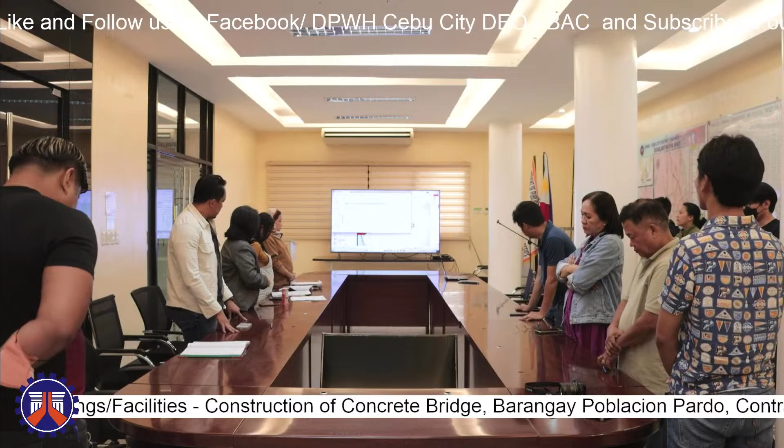Let us put ourselves in the presence of the Lord. Our Heavenly Father, we offer you our thanksgiving. We thank you for everyone gathered here today to walk with you. May we ask you for your blessings and guidance so that the activities set for this undertaking be successful. We ask you to open our eyes to see the wonderful things from this activity, open our ears so that we may retain the invaluable knowledge, open our minds for us to think wisely. Put us with understanding, cooperation, and peace in fulfilling our responsibilities. Open our hearts so that we may receive your everlasting love, and open our spirit so that we may know that you are with us all throughout the day. We ask all this in the name of Jesus Christ. Amen.

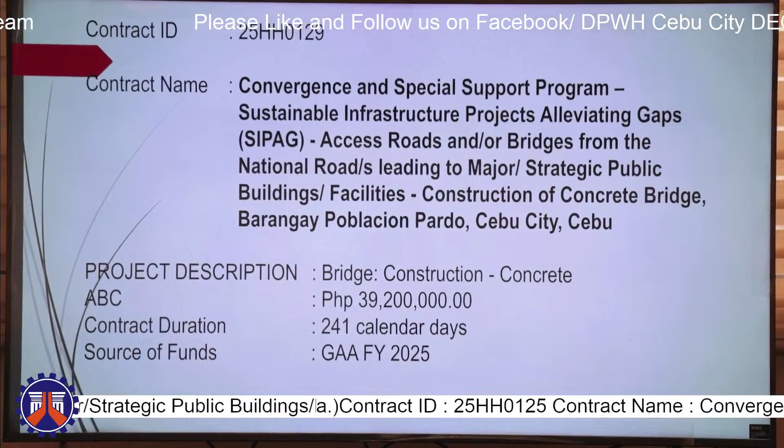Good afternoon, everyone. My name is Engineer Yara, and I will be discussing the project with contract ID 25HH0129, with contract name: Convergence and Special Support Program, Sustainable Infrastructure Projects Alleviating Gaps, Access Roads and/or Bridges from National Roads, leading to major strategic public buildings and facilities, construction of concrete bridge, Barangay Poblacion, Pardo, Cebu City, Cebu. It is a concrete bridge with an approximate budget of contract of 39,200,000, with a contract duration of 241 calendar days, with source of funds from GAA FY 2025.

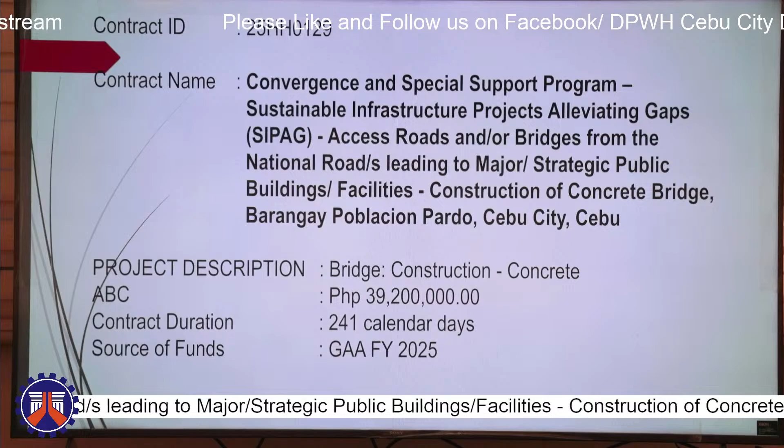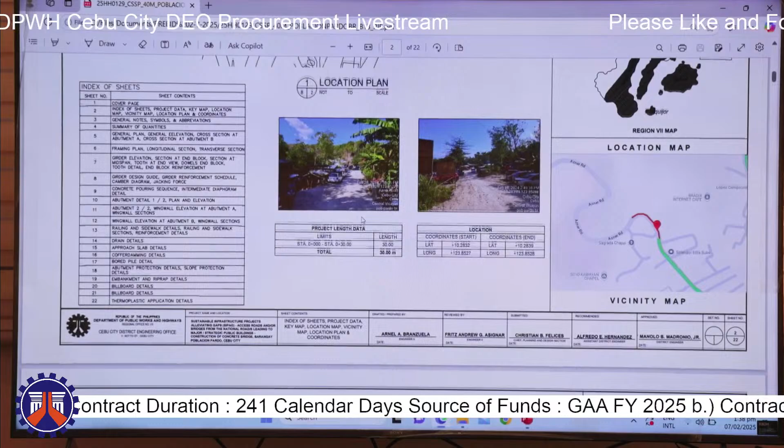The start of the project will be at the gate before Alta Vista Golf and Country Club, and it is a pre-stressed concrete deck girder bridge with a span of 30 meters, and its major scope of work are the following.

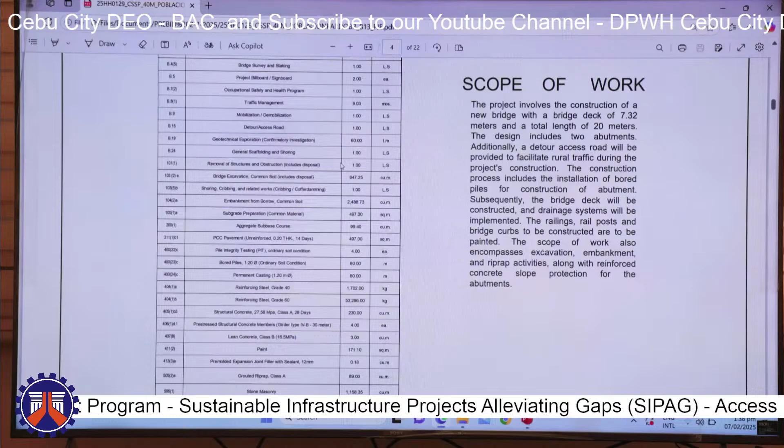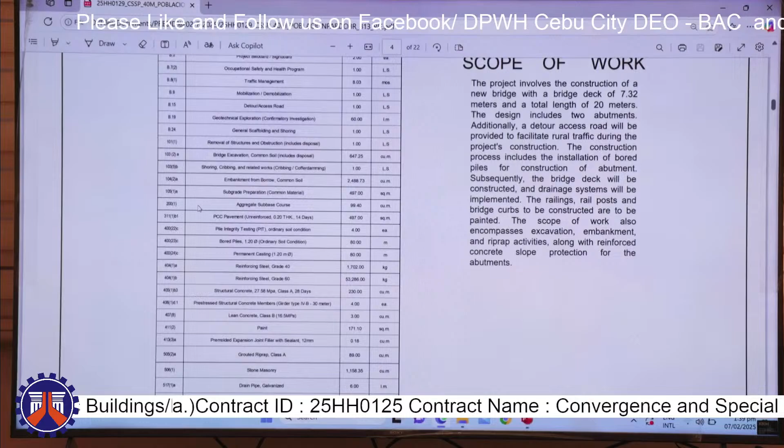We have Item 101, the removal of structures and obstruction. Item 103 for bridge excavation, common soil — this is for the temporary or pre-implementation of the bridge — followed by Item 103-5B and 103-5B for the temporary support for bridge construction. Following that, Item 104 for the embankment borrow, common soil. This is to be done in this area where we are supposed to embank soil for the connection between the two high points of the site.

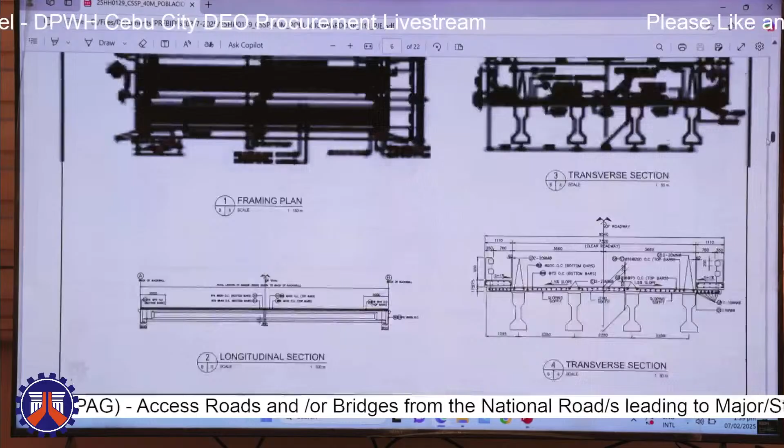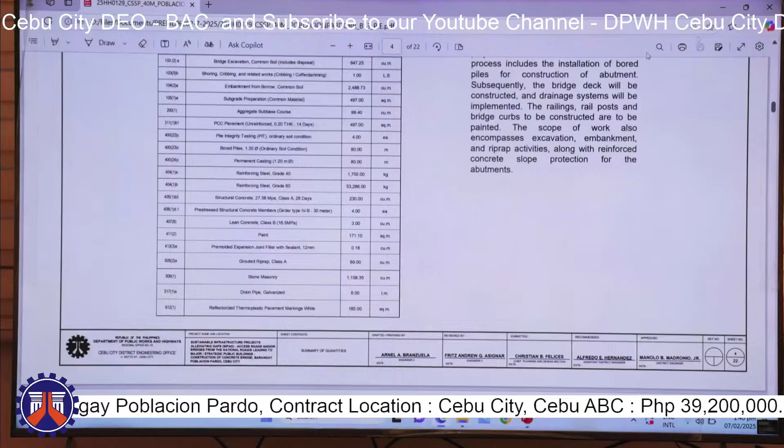Before the establishment of Item 311, the PCC pavement, we are to tackle Item number 105 and 200 for the preparation of Item 311, to be located at station 7 plus 500 to 7 plus 515. This is the start of the bridge, before the approach and then the start of the bridge. Then after the approach from the end of the bridge, which is station 7545, to the high ground, which is located at station 7600.

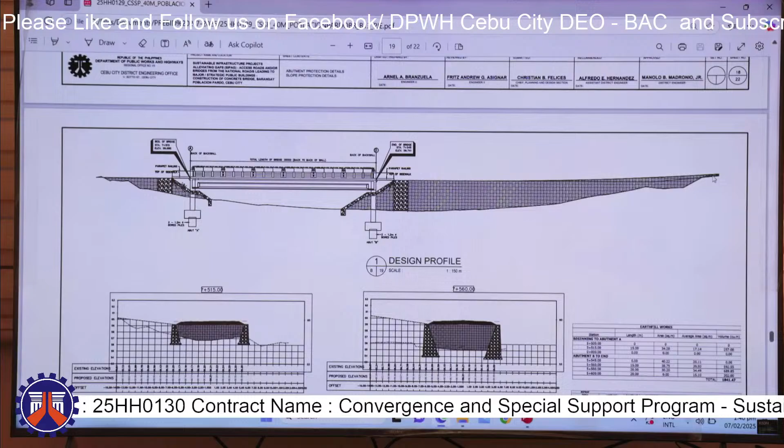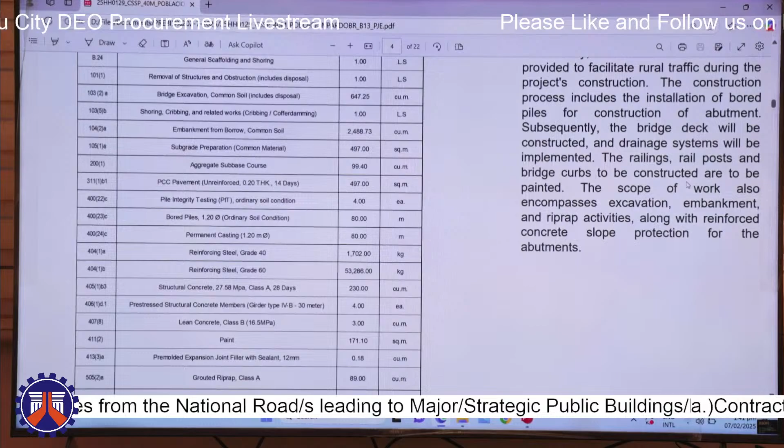Among the items to be tackled before construction of the bridge, we have the pile integrity test for item number 400-22C, 400-23C, and 400-24C. This is for the bored piles to be located at the base of the abutment of the bridge.

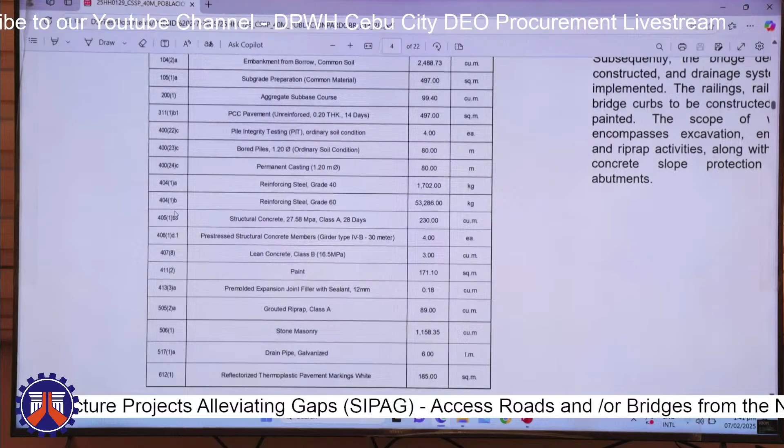Also, for the permanent casing, item 400-24C, also for the bored piles of the bridge. Item numbers 404-1A and 404-1B is for the reinforcement of the superstructure and the abutments of the bridge itself.

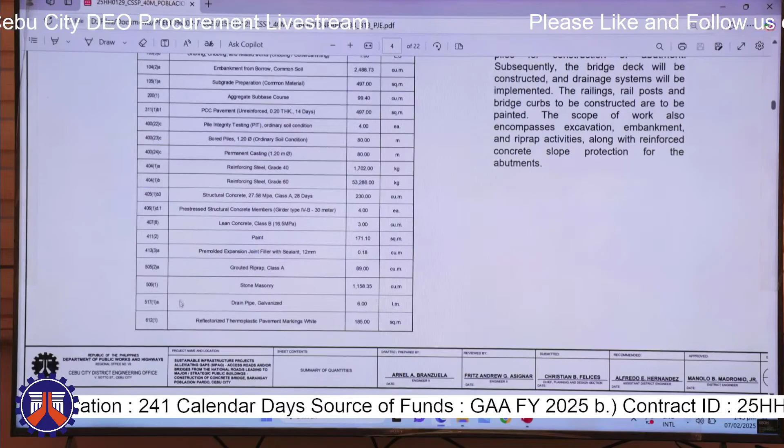For the structural concrete, item number 405-1B3, structural concrete superstructure, we will also be providing item number 411-2, which is the paint. Upon establishment of the superstructure, drain pipe galvanized, item number 517-1A, is to be installed for the water on the deck superstructure and roads, by Engineer Earl.

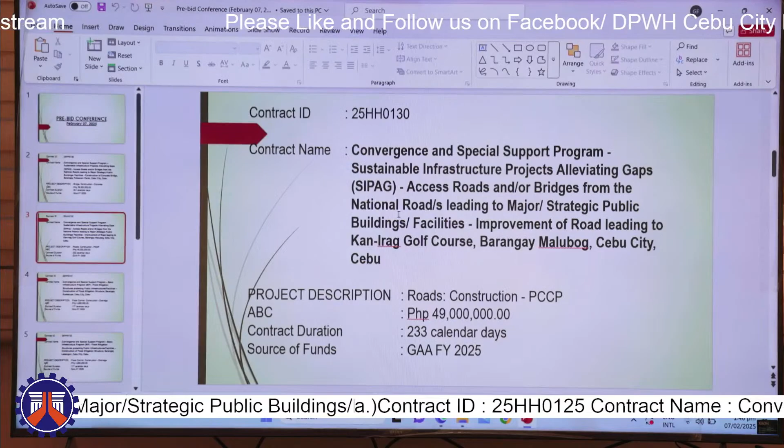Good afternoon. I'm here to discuss our next project with contract ID 25HH0130, contract name Convergence and Special Support Program, Sustainable Infrastructure Projects Alleviating Gaps, or SIPAG, access roads and/or bridges from national roads leading to major strategic public buildings and facilities.

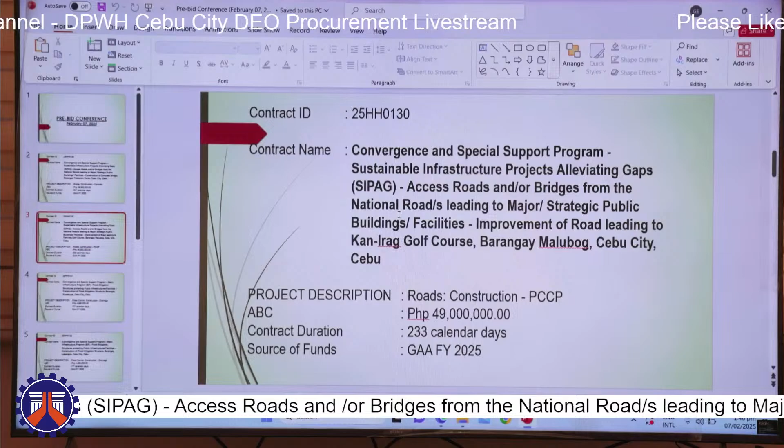Improvement of road leading to Kan-irag Golf Course, Barangay Malubog, Cebu City, Cebu. Project description: roads construction PCCP, with approved budget for the contract of 49 million. Contract duration is 233 calendar days. Our source of funds: GAA FY 2025.

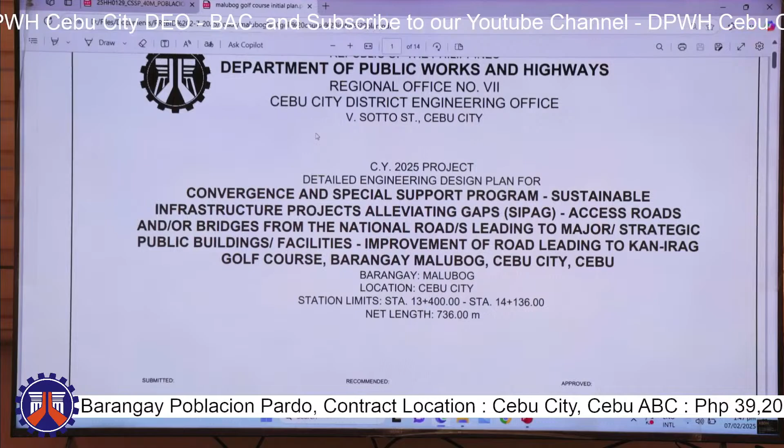Here's our plan. Our station limits start at station 13 plus 400 to station 14 plus 136, with a net length of 736 meters.

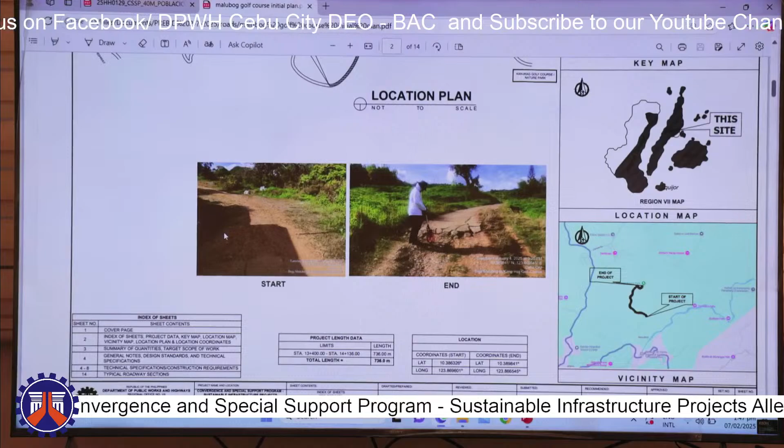We have the start and end coordinates exact, and our summary of quantities.

Our target scope of works. This plan involves construction of 2 lanes, 5 meters wide, 250 mm thick PCCP, with 200 mm aggregate sub-base course. In addition, it includes construction of minor drainage structures. The net length of the project is 736 linear meters.

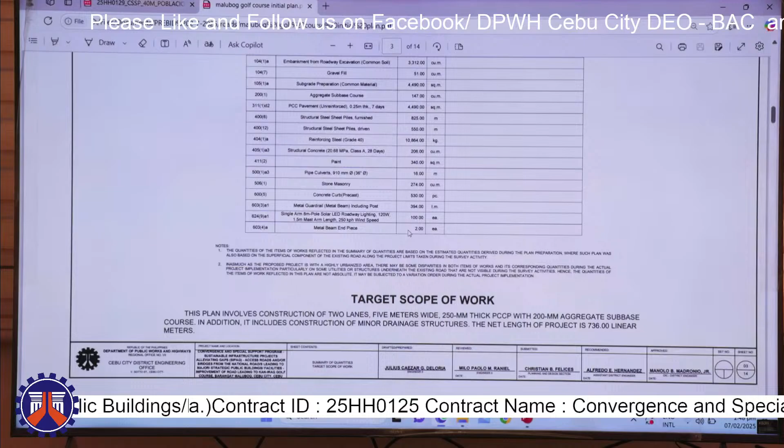Our general notes and technical specifications of the items involved in this project. This one is the general notes for our solar street lights; we will also install solar street lights along our net length. This one shows the typical roadway sections. And that's all.

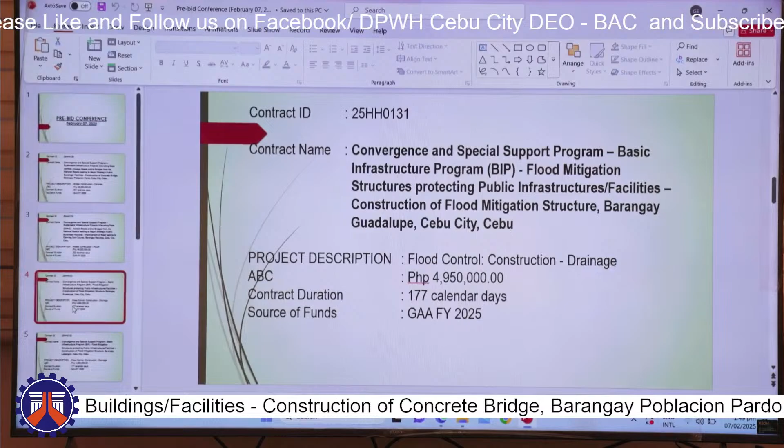Good afternoon, everyone. I'm here to discuss the contract ID 25HH0131, with the contract name Convergence and Special Support Program, Basic Infrastructure Program BIP, Flood Mitigation Structures Protecting Public Infrastructures or Facilities, Construction of Flood Mitigation Structure, Barangay Guadalupe, Cebu City, Cebu, with the project description: flood control, construction of drainage.

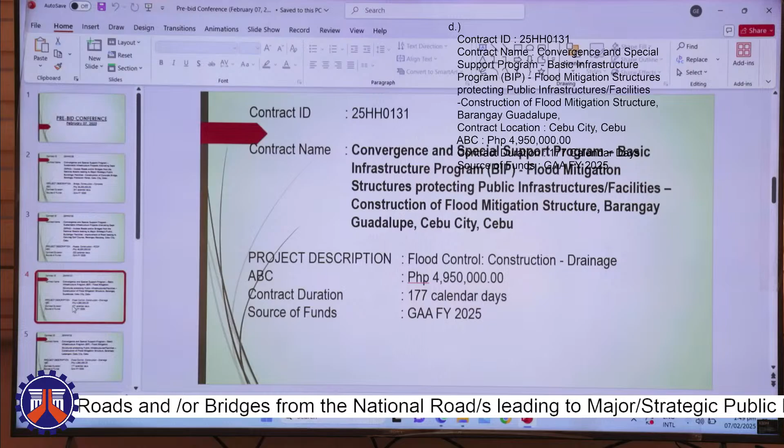With approved budget for the contract of 4,950,000 pesos, with a contract duration of 177 calendar days. Source of funds: GAA FY 2025.

So here's our project, located at Barangay Guadalupe. This project has two sites with the limits.

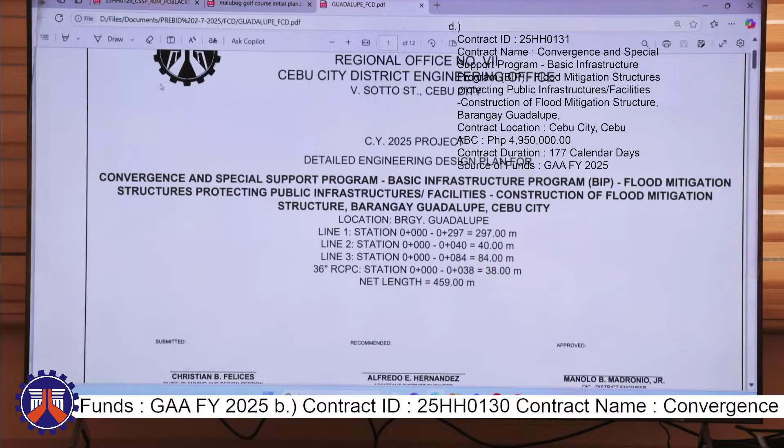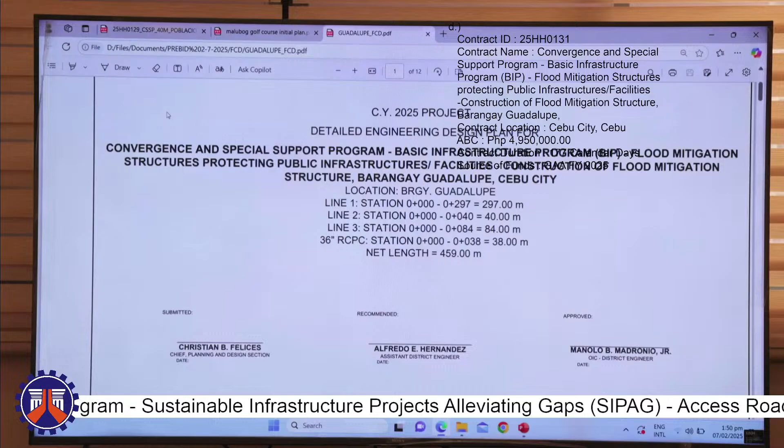Station limit starts from Line 1, station 0 plus 00 to 0 plus 297, for 297 meters. Line 2, station 0 plus 00 to 0 plus 040. Line 3, 0 plus 00 to 0 plus 084. For the 36 RCPC, station starts at 00 to 0 plus 038, and the total net length is 459 meters.

The first site is located along Abellana Extension at Barangay Guadalupe, and the second site is located at Espina Village in Barangay Guadalupe. This is our location plan.

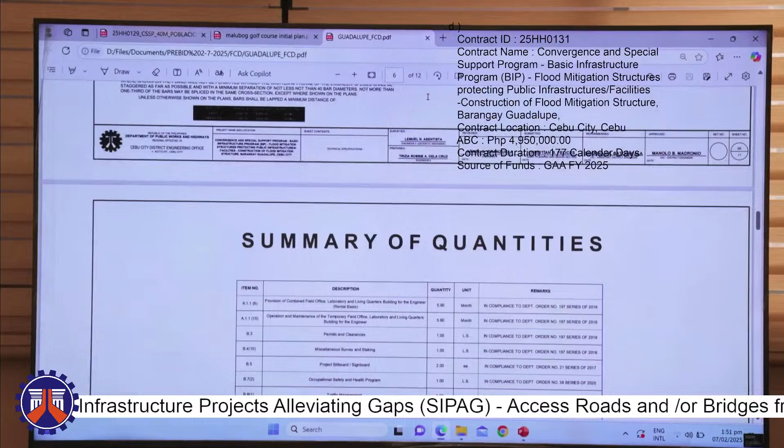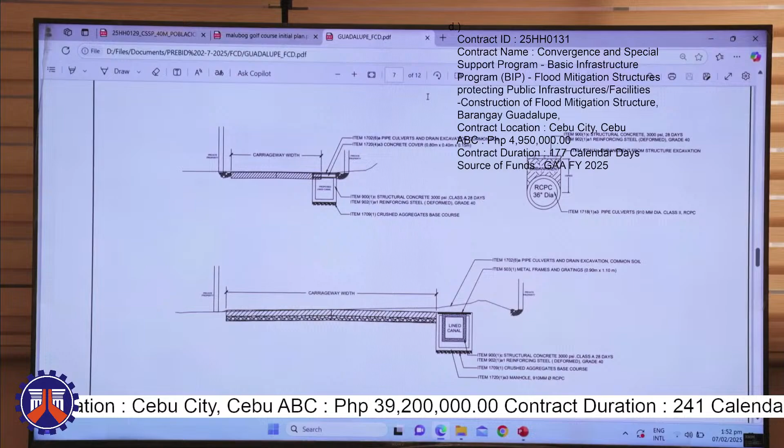Item 17204A3, concrete cover with dimensions 0.8 by 0.4 by 0.5 by 0.15 meters. And with the proposed lined canal, for item 901C, structural concrete 3,000 PSI, Class A, 28 days.

Item 900-021A1, reinforcing steel deformed, grade 40. And for the crushed aggregate base course, item 17091.

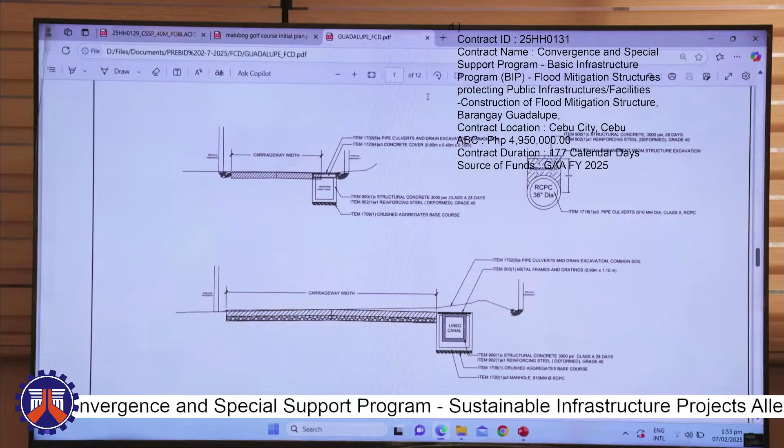And for the 36 inches diameter RCPC, item 17181A3, pipe culverts, and for its top slab, item 901C, structural concrete 3,000 PSI 28 days, item 902-1A1, reinforcing steel deformed, grade 40, and for the embankment from structure excavation, item 17041A.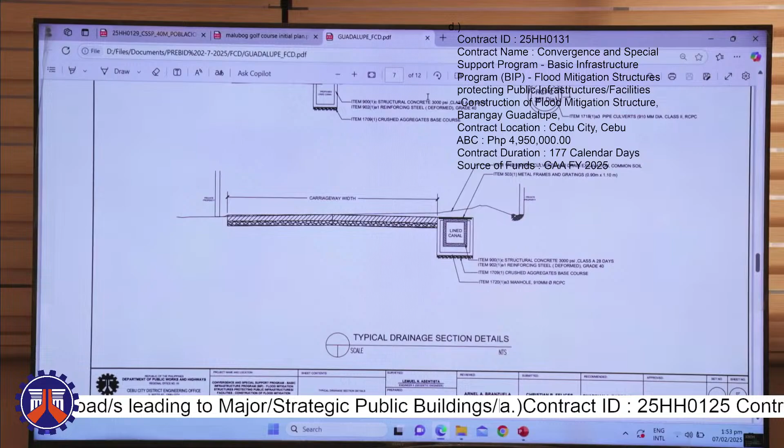Next is item 17026A, pipe culverts and drain, excavation of common soil, and item 5031, metal frames and gratings, with dimension 0.9 by 1.1 meters.

And for the manhole, proposed manhole, item 17201A3, for 910 mm RCPC. For roadway sections, typical manhole, and line schedule, bar schedule of line canal.

And for the next presenter.

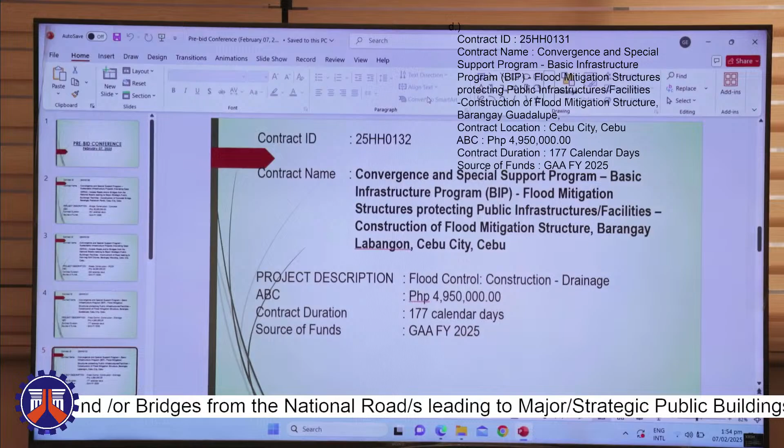Good afternoon, everyone. So I'm going to discuss contract ID 25HH0132, contract name Convergence and Special Support Program, Basic Infrastructure Program, Flood Mitigation Structures Protecting Public Infrastructures Facilities, Construction of Flood Mitigation Structure, Barangay Labangon, Cebu City, Cebu.

Project description: flood control, construction of drainage. ABC is 4,950,000. Contract duration is 177 calendar days. Source of funds is GAA FY 2025.

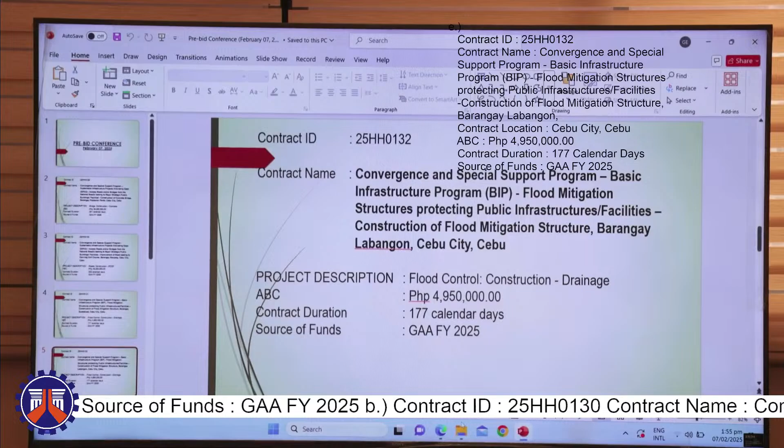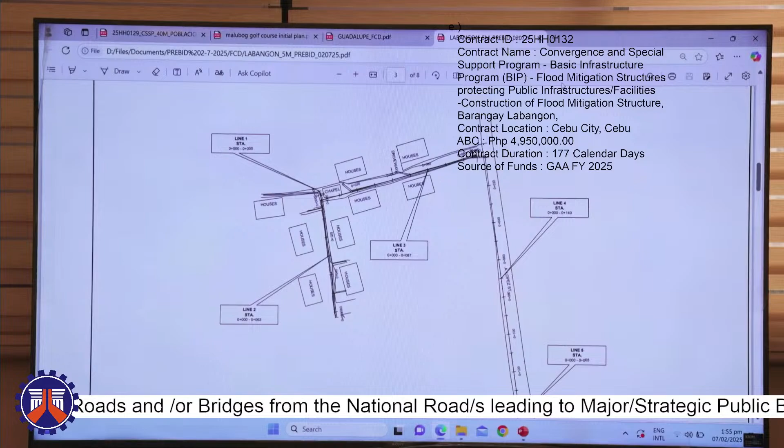So this is the location map. It is along Lopez Street, and we have a chapel here. One of the problems of the site is that it has a lower level compared to the roadside, so we need to trace an outfall that will allow the flow of water and be able to drain.

So for the summary of quantities we have here. Later we can see the summary of quantities in the typical design of drainage. So under here, we can see the concept design of the flood.

So we propose to have a manhole every 10 meters because we want to maintain the slope of 2% to the outfall.

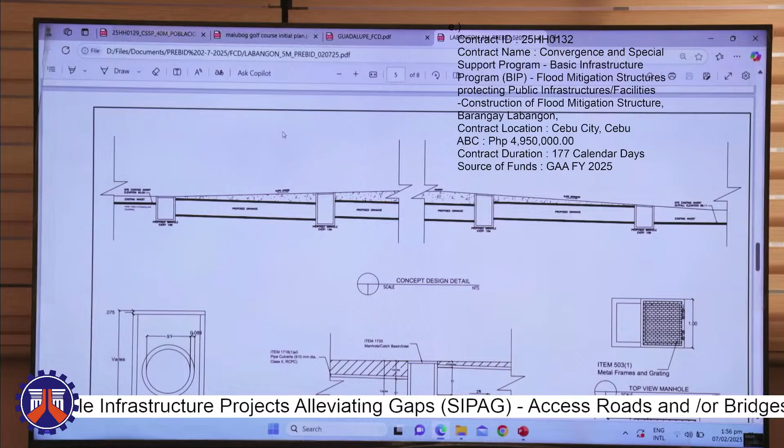So there's the concept design. We also recommend clearing and grubbing in the existing invert. Then we will have the proposed manhole, the first proposed manhole. As you can see, the slope is upward, so it's really difficult to have this designed in the conventional way, so we introduced this kind of design.

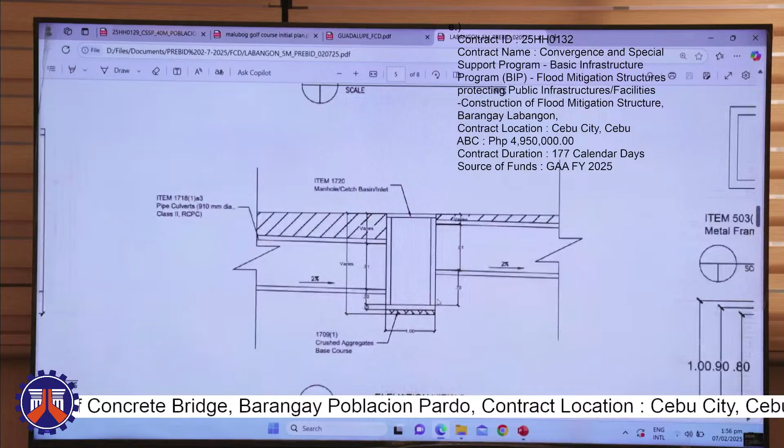So after the concept design, we have the elevation view of the manhole. We also have elevation view 2, which shows the dimensions and heights. For the upper part, you can see it varies because in the concept design the upper part also varies, but for the bottom part, it's constant.

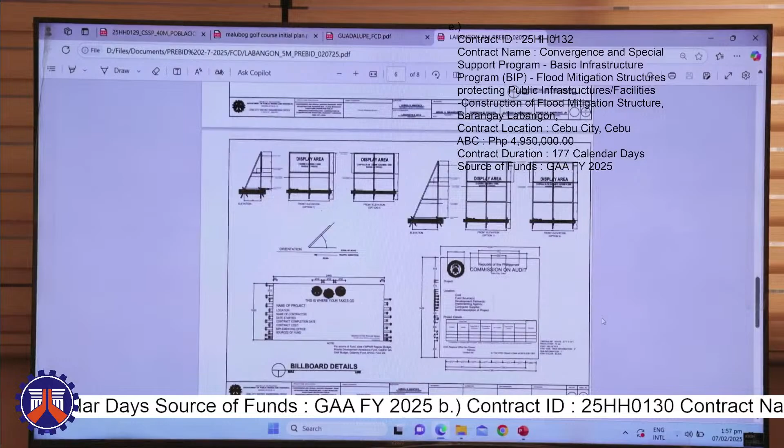So this is for the steel grating, and we also have the spot detail for the steel frame. Next will be the billboard details and the traffic management. That's all, thank you.

Next we have contract ID 25HH0133.

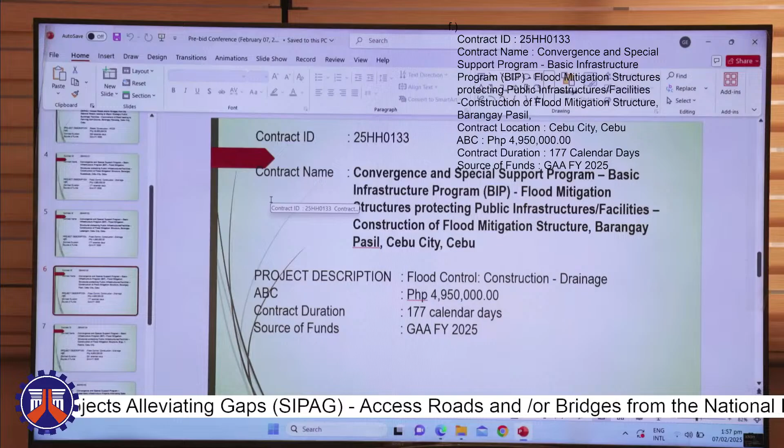Good afternoon, everyone. I'm going to discuss contract ID 25HH0133 with contract name Convergence and Special Support Program, Basic Infrastructure Program, Flood Mitigation Structures Protecting Public Infrastructures Facilities, Construction of Flood Mitigation Structure, Barangay Pasil, Cebu City, Cebu, with project description flood control, construction of drainage.

The approved budget for the contract is 4,950,000 with a contract duration of 177 calendar days and GAA FY 2025 as source of funds.

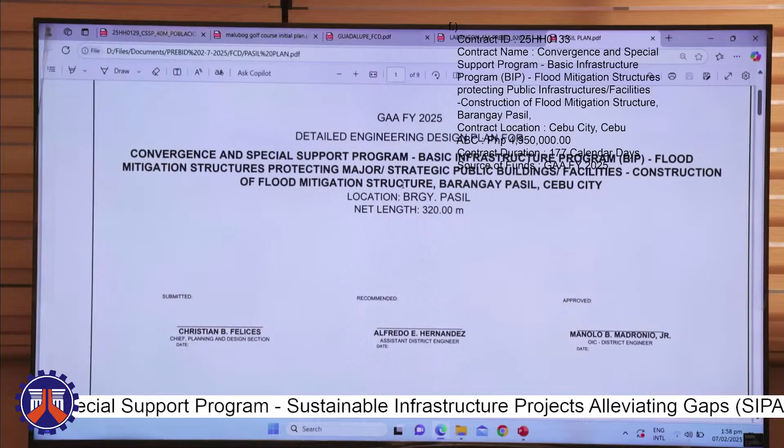So for this project, we have a net length of 320 meters, and it is located beside Barangay Pasil Barangay Hall. And here's the geotag photos provided using items 9001C and 9021A1.

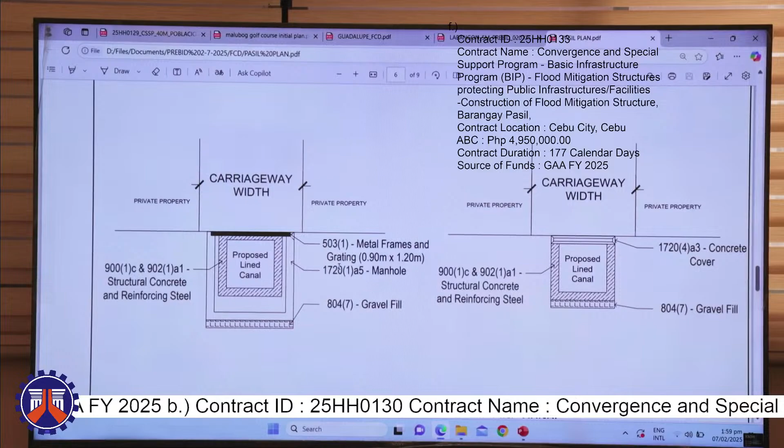These are for the structural concrete and reinforcing steel for the structure of the canal, and there will be a manhole as well for item 17201A5, with cover of metal frames and gratings with dimension 0.9 by 1.2 meters.

For the line canal, there will be a concrete cover provided every 3 meters with item 17204A3. I think that's it for this project.

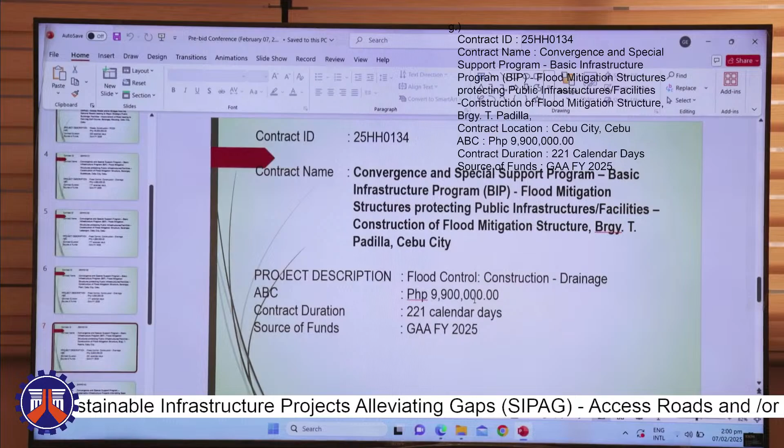For the next project, it has a contract ID of 25HH0134 with contract name Convergence and Special Support Program, Basic Infrastructure Program, Flood Mitigation Structures Protecting Public Infrastructures Facilities, Construction of Flood Mitigation Structure, Barangay T. Padilla, Cebu City, with project description flood control, construction of drainage. The approved budget for the contract is 9,900,000 pesos, and the contract duration is 221 calendar days with source of funds GAA FY 2025.

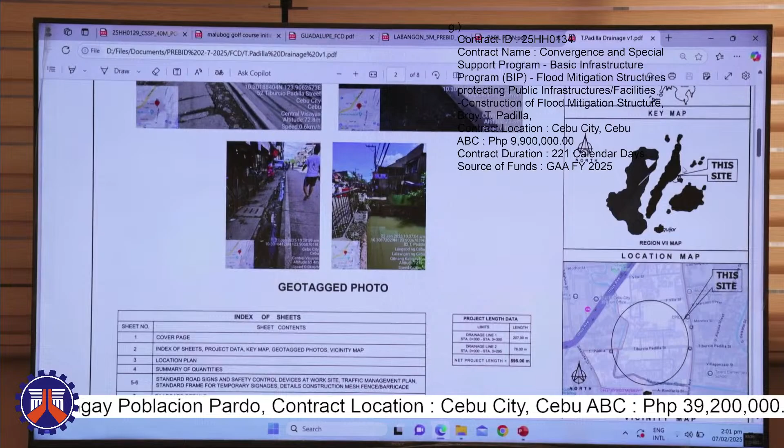For drainage line 1, it has 300 meters, and for drainage line 2, it's 295 meters. And the location for this project is along T. Padilla Street.

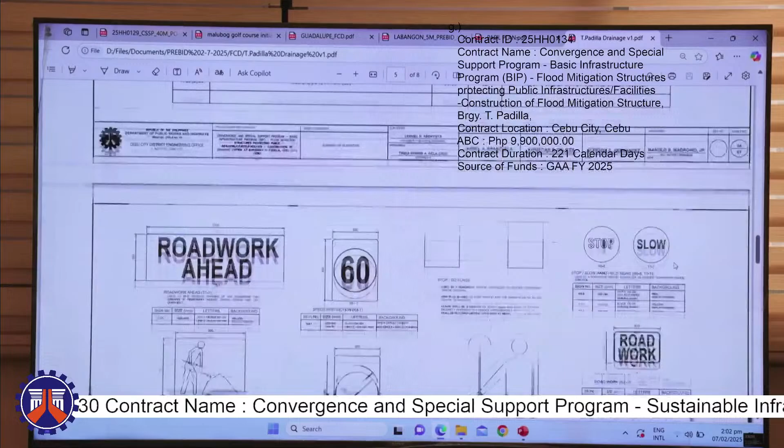So here's the location plan for the project. And here's also the summary of quantities for the items that are going to be used for this project. Here's also standard road signs and safety.

So the target scope of work for this project is construction of drainage line canal with manholes. And for the manhole, item 1721A3 will be utilized with steel grating cover, item number 5031.

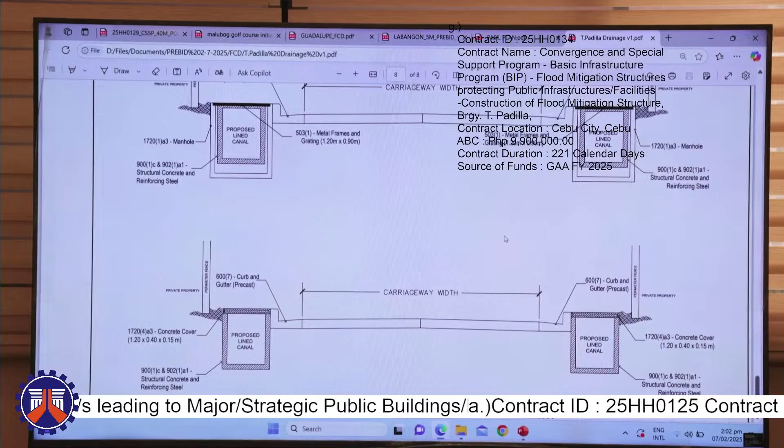And for the line canal, the items used will be 900-1C and 902-1A1, structural concrete and reinforcing steel. And for this drainage line canal, concrete cover will be provided every 3 meters. And there will also be curb and gutter with item number 600-7.

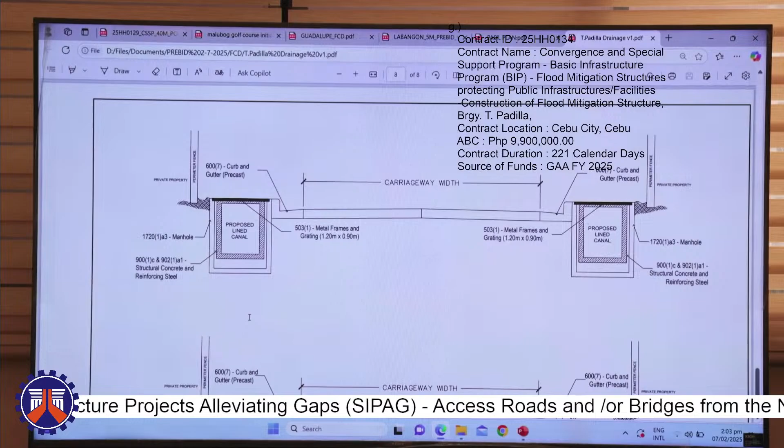And that's it for this project. For the next project, this is going to be discussed by Engineer Tan.

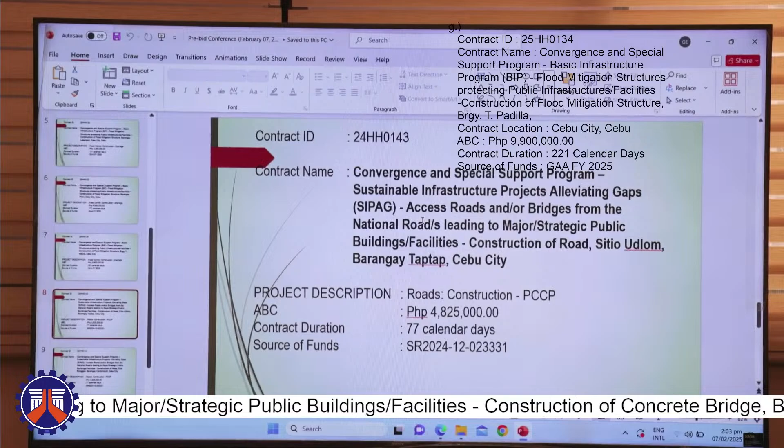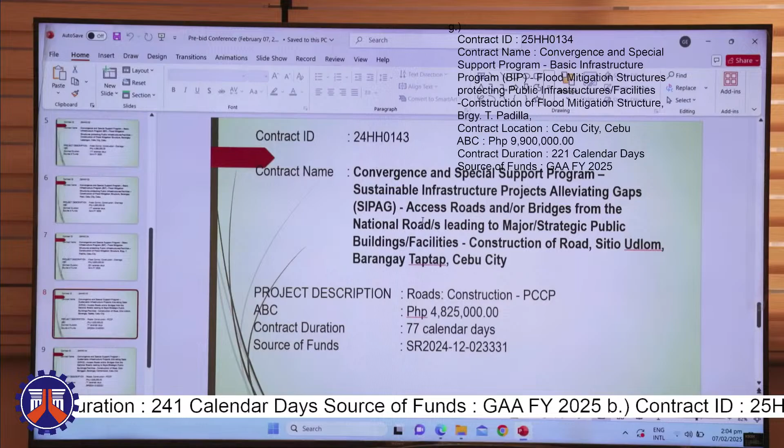Good afternoon, everyone. So the next project to be discussed has a contract ID of 24HH0143, with the contract name Convergence and Special Support Program, Sustainable Infrastructure Projects Alleviating Gaps, Access Roads and/or Bridges from the National Roads leading to major strategic public buildings or facilities, construction of road, Sitio Udlom, Barangay Taptap, Cebu City, with a project description of roads construction PCCP and approved budget for the contract of 4,825,000 pesos, and a contract duration of 77 calendar days, and source of funds SR 2024 1202 3331.

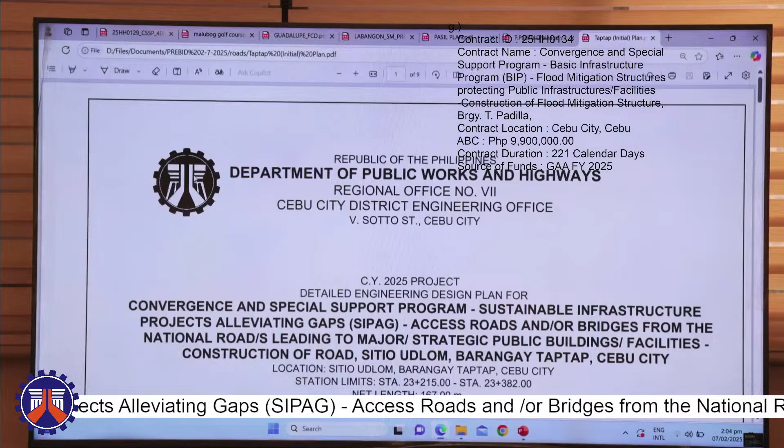So this project has station limits of station 23 plus 215 to station 23 plus 382 with a total length of 167 meters. So this is the location plan of the project.

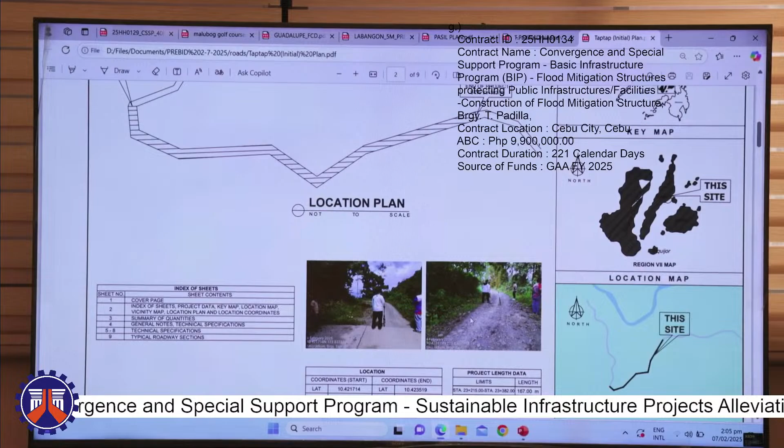This is the continuation of the 2024 project in Barangay Taptap. So as you can see, the location has existing concrete, then it's a continuation. Then we also have the geotag so that we can locate the precise location of the project.

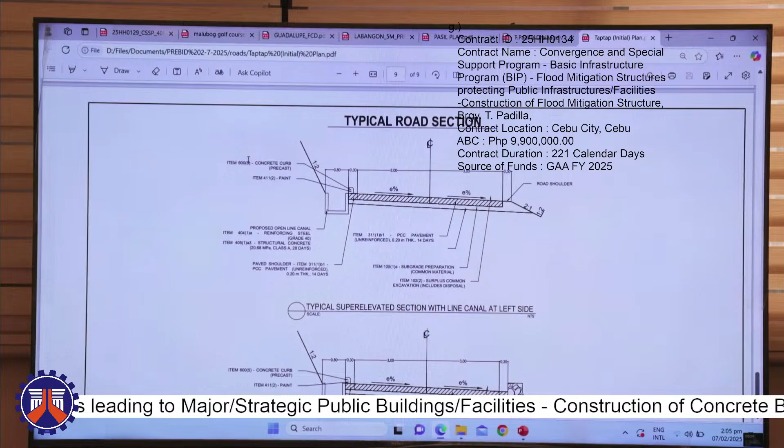As you can see here, item 600-5, we have concrete curb precast, and item 4112 for paint. And for the proposed open line canal, we have item 4041A and item 4051A3. Then for the PCCP, we have unreinforced 0.20 meters thick, 14 days.

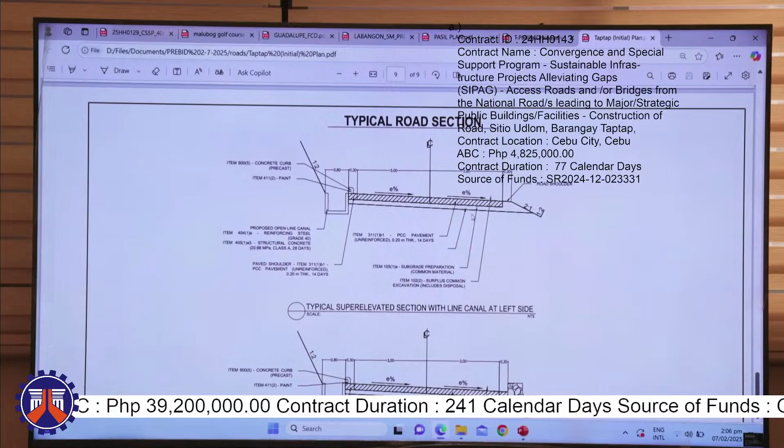Then we also have 105(1)a subgrade preparation common material. Then we have also surplus common excavation. Then for the other roadway section with stone masonry, on the right side we have item 506.1 stone masonry. Then I think that's all for this project.

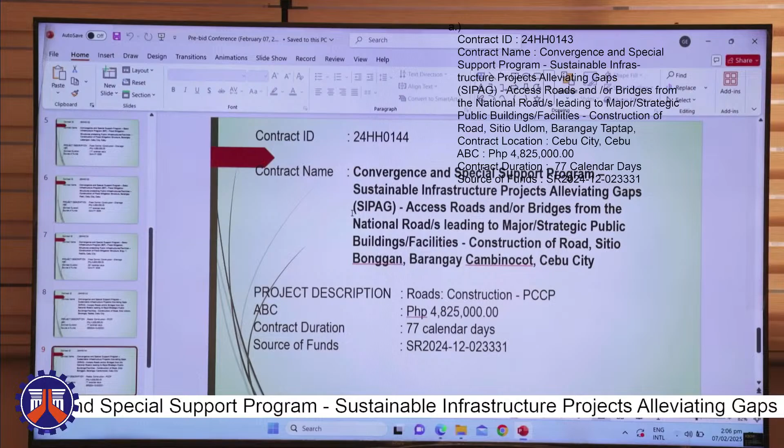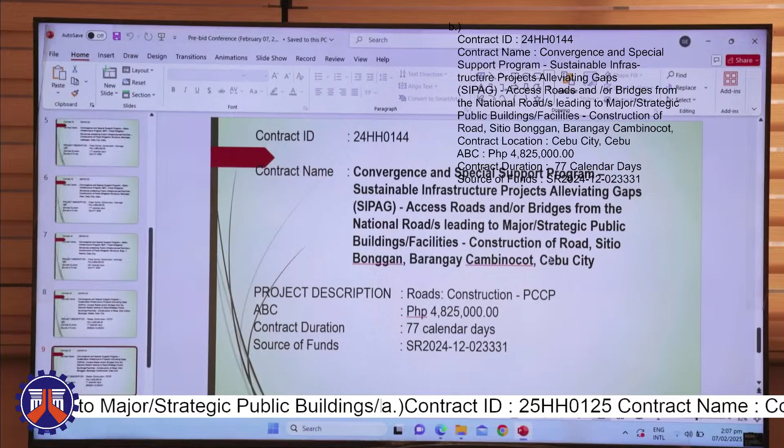So the next project has the contract ID of 24HH0144, Convergence and Special Support Program, Sustainable Infrastructure Projects Alleviating Gaps, Access Roads and/or Bridges from the National Roads leading to major strategic public buildings or facilities, construction of road, Sitio Bonggan, Barangay Cambinocot, Cebu City, and the project description of roads construction, PCCP, and approved budget for the contract of 4,825,000 pesos, and the contract duration of 77 calendar days, and source of funds SR2024-12-023331.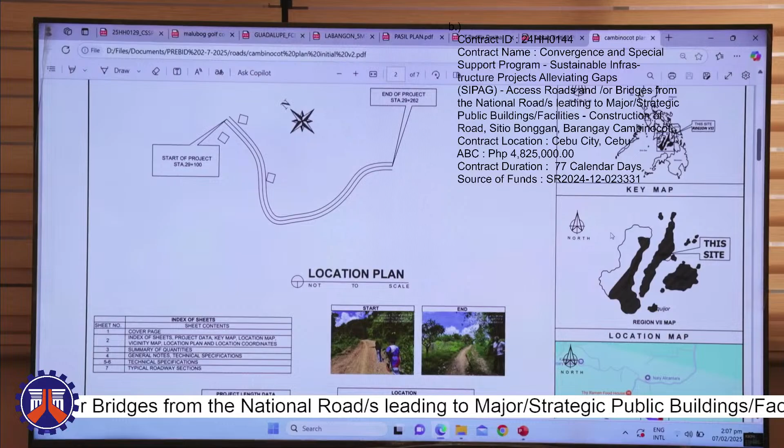We also have the geotag so that you can easily locate the precise location of this project. Here we have the summary of quantities. We will proceed to the typical sections to further elaborate its scope of work.

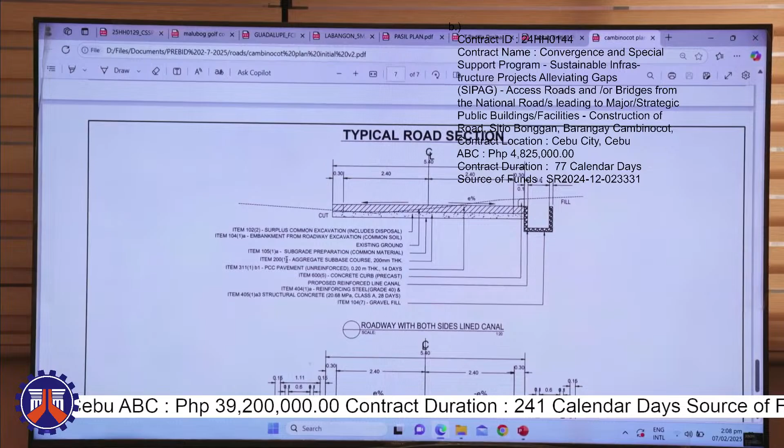So here we have item 102 for the surplus common excavation. We also have item 104 for embankment from roadway excavation. We have item for the PCCP, item 1051A, subgrade preparation common material.

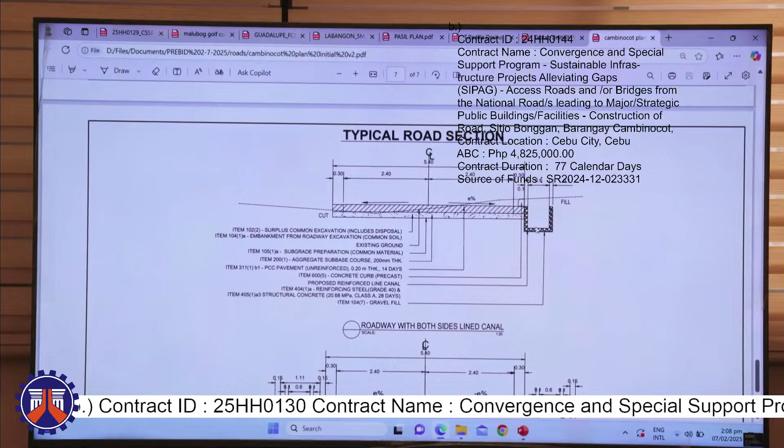We have item 200, aggregate sub-base course 200 mm thick. And we also, for the PCCP, we have 0.20 meters thick, 14 days curing. And for the canal, we have items 404, reinforcing steel grade 40, and item 4051A3 for the structural concrete, and lastly 1047 for the gravel fill.

Here, this is the typical roadway section which has manholes. We have item 502-1A3 for the manhole, 910 mm diameter. And we have item 103-6A for the pipe culvert and drain excavation.

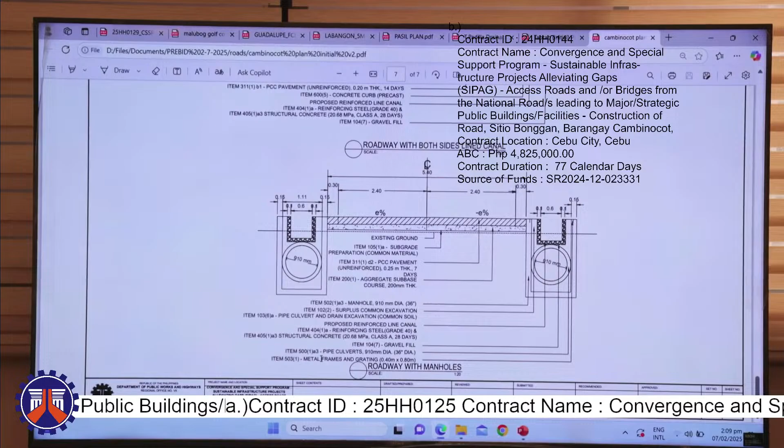And we have item 5001A3, pipe culverts, 910 millimeters diameter. And lastly, item 5031 with the metal frames and grating, 0.4 by 0.8. Guess that's all for this plan. We will proceed to the next project.

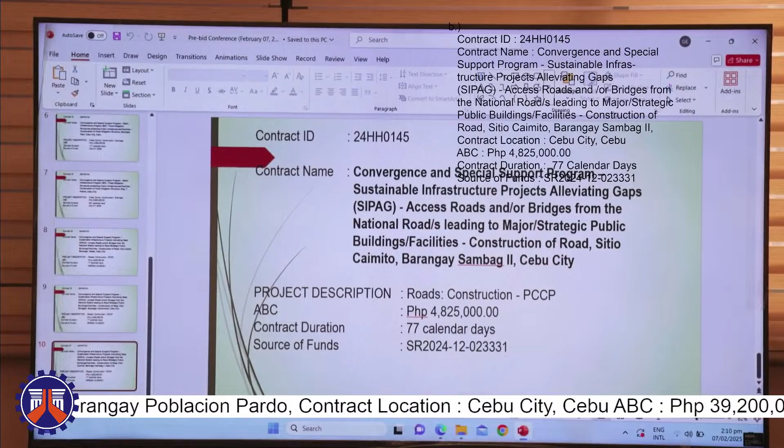Good afternoon. For our last project, with a contract ID of 24HH0145, contract name Convergence and Special Support Program, Sustainable Infrastructure Project Alleviating Gaps or SIPAG, access roads and/or bridges from national roads leading to major strategic public buildings, facilities, construction of roads, Sitio Caimito, Barangay Sambag Dos, Cebu City.

Our project description: roads, construction, PCCP. The approved budget for the contract, 4,825,000. Contract duration of 77 calendar days. Our source of funds, SR 2024-12-023331.

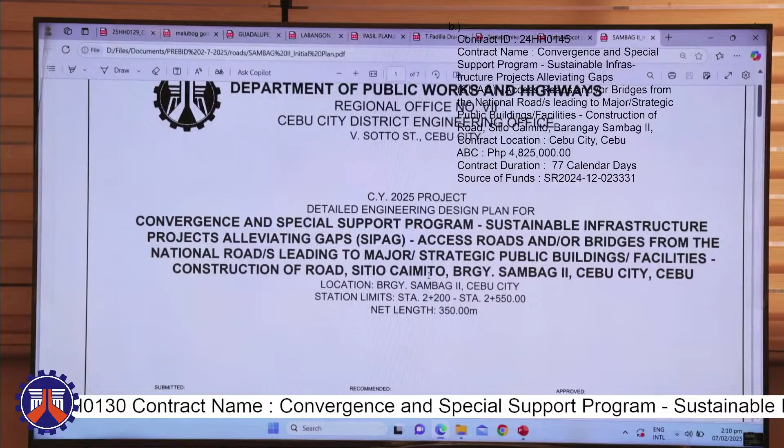Here's our plan. It has a station limits starting from station 2 plus 200 to station 2 plus 550, with a net length of 350 meters.

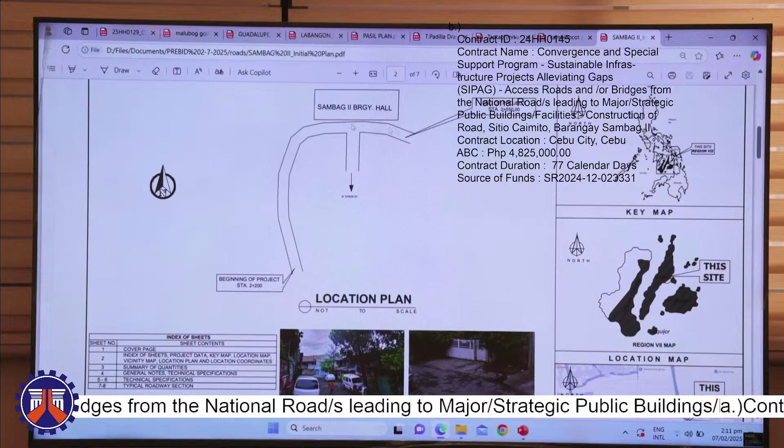Here is our location plan. Our project is here in front of the Barangay Sambag Dos Barangay Hall. This is the beginning of our project, station 2 plus 200, going to Sambag Dos Barangay Hall, and our end station is 2 plus 550. Here we have our exact coordinates for the start and end of the project.

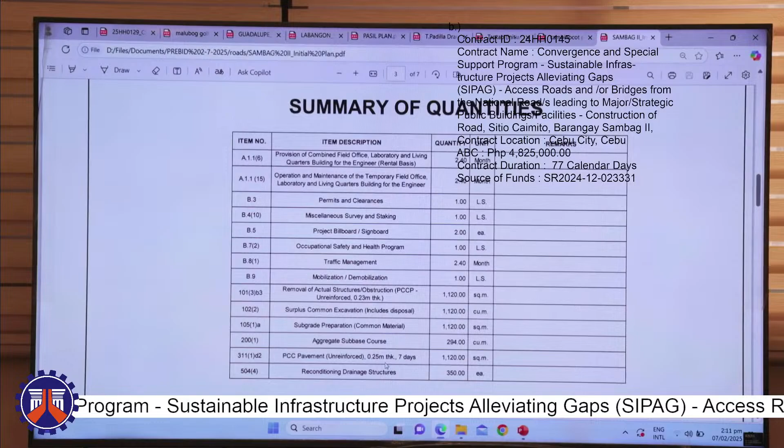This is our summary of quantities. It involves the removal of actual structures, PCCP unreinforced 0.23 meter thick, surplus common excavation, subgrade preparation, aggregate sub-base course, PCC pavement unreinforced 0.25 meter thick, 7 days, and also the reconditioning of the drainage structures.

Our target scope of work involves construction of 250 mm thick PCCP pavement that varies from 3.5 to 3.7 meter width, 200 mm thick aggregate sub-base course, subgrade preparation, and reconditioning of drainage structures, with a net length of the project of 350 linear meters.

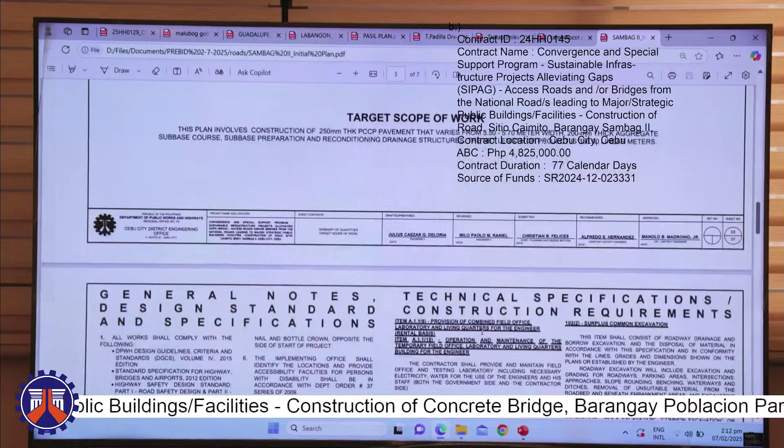This one covers our general notes and technical specifications involved in this project. And lastly, we have our typical roadway section. That's all.

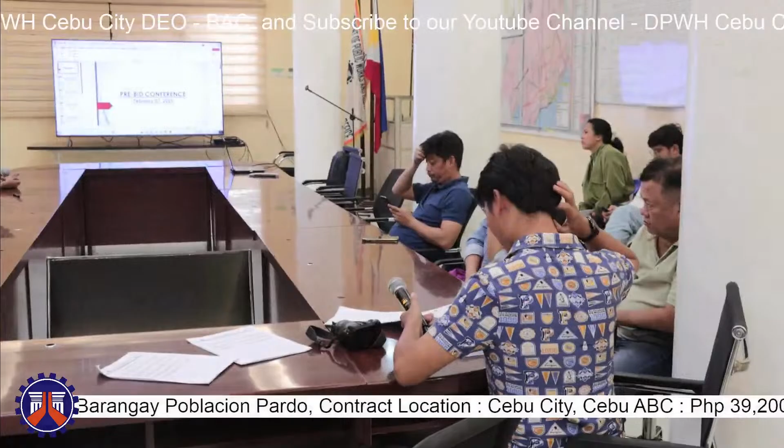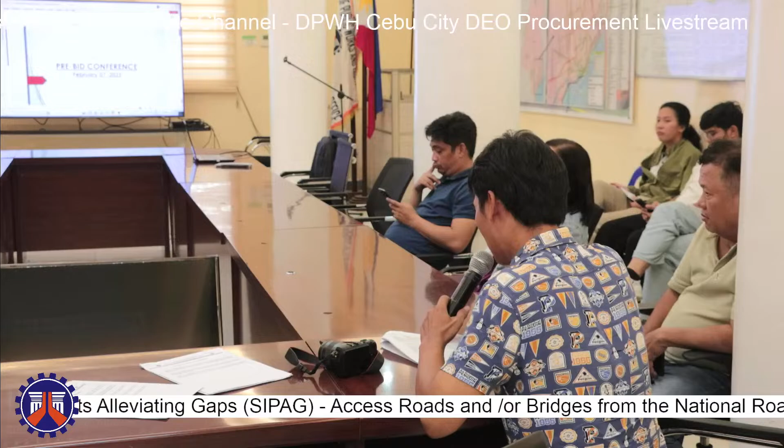For the information of prospective bidders: contractors should be registered with and classified by the Philippine Contractors Accreditation Board, or PCAB, with a PCAB license applicable to the type and cost of the mentioned contracts. Contractors or applicants who wish to participate in this bidding are encouraged to enroll in the DPWH Civil Works Application, or CWA, at the DPWH Procurement Service in Manila, while those already enrolled shall keep their records current and updated. Contractors' eligibility to bid on the project will be determined using the DPWH Contractor Profile Eligibility Process, or CPEP, and subjected to further post-qualification.

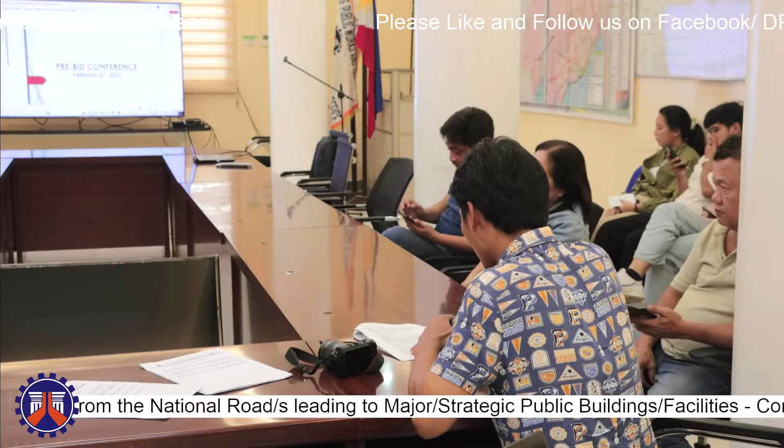Bidding will be conducted through open competitive bidding procedures using non-discretionary pass or fail criterion as specified in the 2016 revised Implementing Rules and Regulations, or IRR, of Republic Act number 9184. Interested bidders may obtain further information from the Department of Public Works and Highways, Cebu City District Engineering Office. A complete set of bidding documents must be submitted.

A bid must be accompanied by a bid security in any of the acceptable forms and in the amount stated in the ITB. The Department of Public Works and Highways, Cebu City District Engineering Office, reserves the right to reject any and all bids, declare a failure of bidding, or not award the contract at any time prior to contract award, in accordance with Sections 35.6 and 41 of the revised IRR of RA 9184.

So I guess that's all for the reminders for the bidders. Thank you, and may I also add, in the submission of your technical and financial documents, please ensure that it has been properly bound using the standard format and standard size of paper, because it is common that when we open the bids, there are times the pages get separated. So please ensure that it is properly bound so as not to create any missing pages in your bid documents.